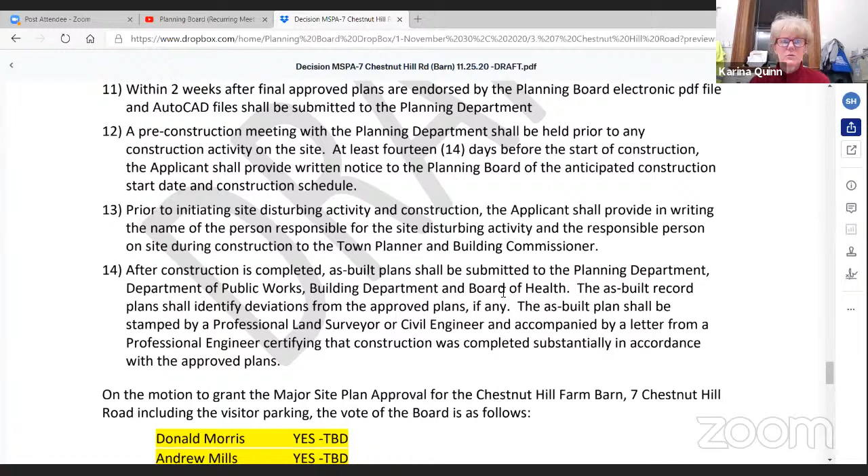Number 14: after construction is complete, the as-built plans shall be submitted to the planning department. That's a standard requirement, as well as to the DPW building department and Board of Health. And that will be a total of 15 conditions, because we added one between 7 and 8.

Okay, so unless somebody has an objection, then we would entertain a motion to accept these, to include these conditions as written and/or revised.

Mr. Mills: I make a motion we accept the conditions for 7 Chestnut Hill Road as reviewed and amended this evening. Seconded. Motion's been made and seconded. Any discussion?

Bob, DA, all set? Yes. Hearing nothing else, all in favor? Morris, yes. Mills, yes. Stein, yes. Latrell, yes. Houlihan, yes. Okay, so we've gone over all the materials, we've gone over the waivers and the conditions.

So we'll give the public and ourselves an opportunity to add anything else. If not, we would entertain a motion to close the public hearing. Anyone else? Questions, comments? I'm not seeing any hands raised at the moment.

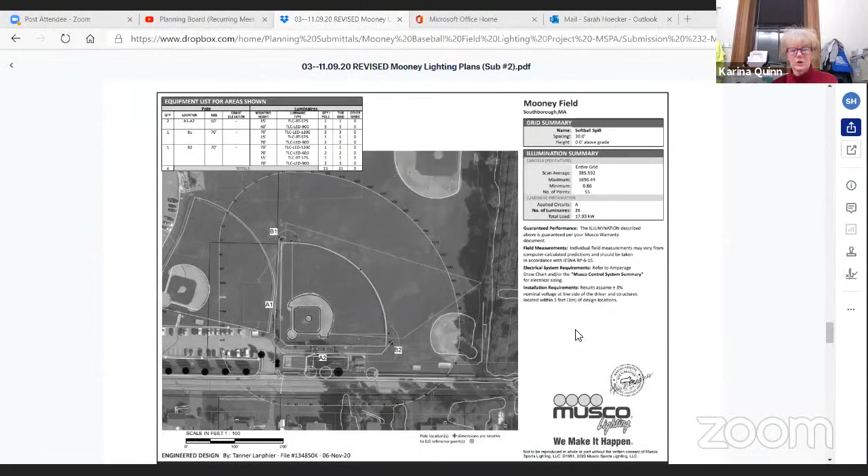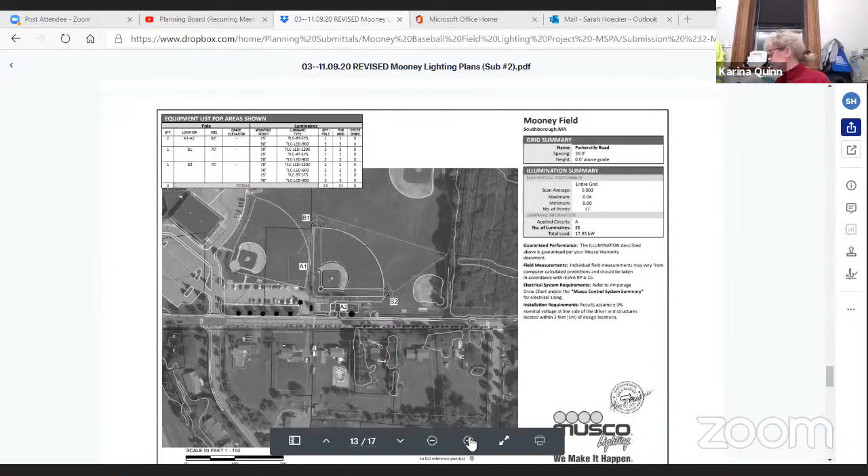But here, you can see on the screen, if you look at the bottom center, there's an A2. Well, you got to keep going a couple more sheets down. Right here, stop, either one of those. See, one is this, right there, stop right there, that's horizontal foot candles. And if you look south of the A2 label, right there, it'll say 0.04 or 0.02. So that's across the street, and there are street lights there. That's all I'll add to that.

In terms of adding shielding, if you've been in these meetings, all of our fixtures come with shields. We have looked at this 6,000 different ways to reduce the spill beyond this. To be at 100th of a foot candle that close in proximity to the field, there isn't any way to reduce that anymore. As Karina just said, we went out multiple decimal points here showing and displaying what the actual is. The reality is that's dark. It's black to be at that many decimal points out beyond 0 foot candles.

Anything else, Mimi? Well, my concern is that our bylaw says 0. There've been issues at Choate Field, and those abutters are much further away. I think we should do everything we possibly can to protect those abutting properties. They're very close right across the street. There's not huge trees or anything in their front yards to shield them from the lights.

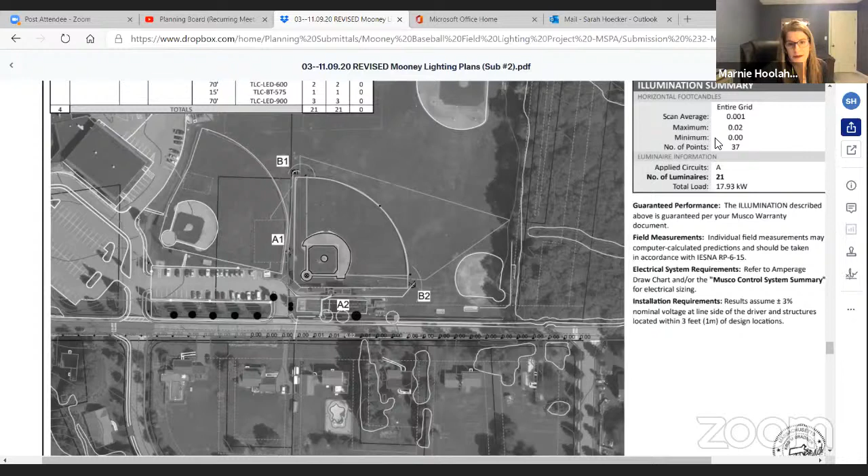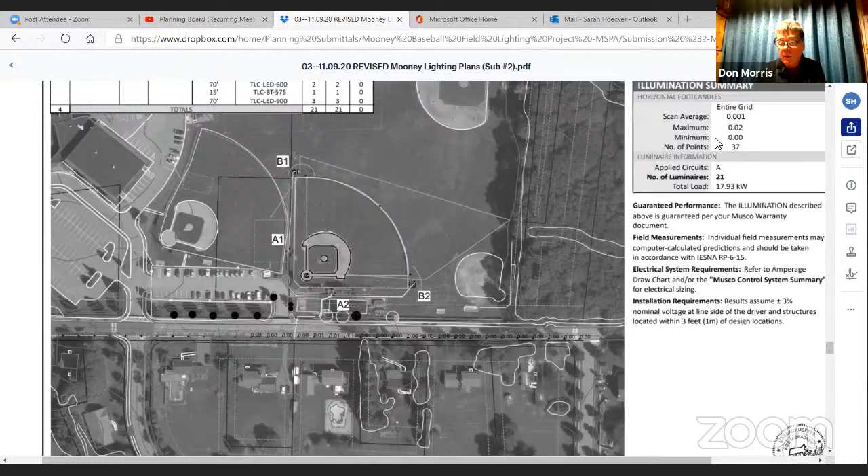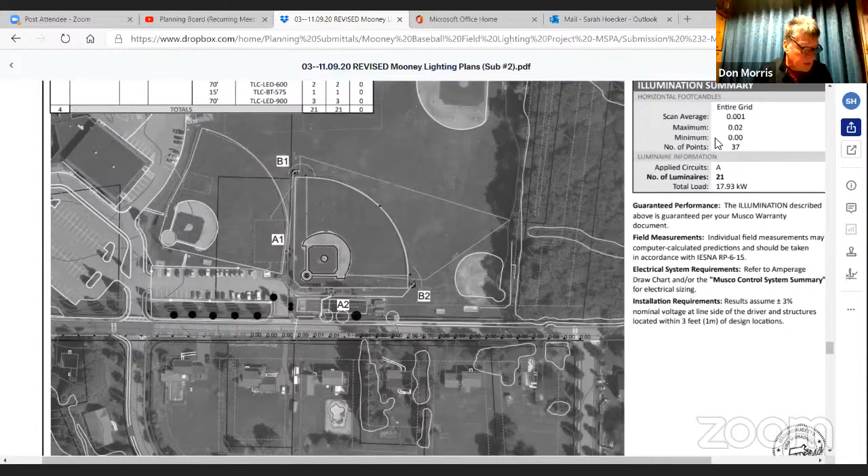So did Mrs. Houlihan speak to this? I'm fine with the waiver as requested. Mr. Mills? So moved, seconded. So the motion to grant the waiver has been made and seconded. Any discussion? All in favor: Morris, yes. Mills, yes. Stein, yes. Latrell, no. Houlihan, yes. 4-1. It's been granted.

So are there any other waivers? Nope, that's it. No, that was it for the waivers. Agree with that, Tim? Oh, sorry, yes, agreed. Okay.

So we want to go down through the conditions, the draft conditions. The reason we do this with these conditions is to discuss them and give you the opportunity to disagree or agree. But again, the vote relative to the conditions would be after we close the public hearing. So Karina, you want to take us down through, let's see.

Seven conditions? Ones that are highlighted? Oh yeah, I got the pages in the wrong order. I'll go through the boilerplate ones really fast and we'll just stop at the more specific ones. Go ahead. All right, Sarah, if you want to put the draft there, thanks.

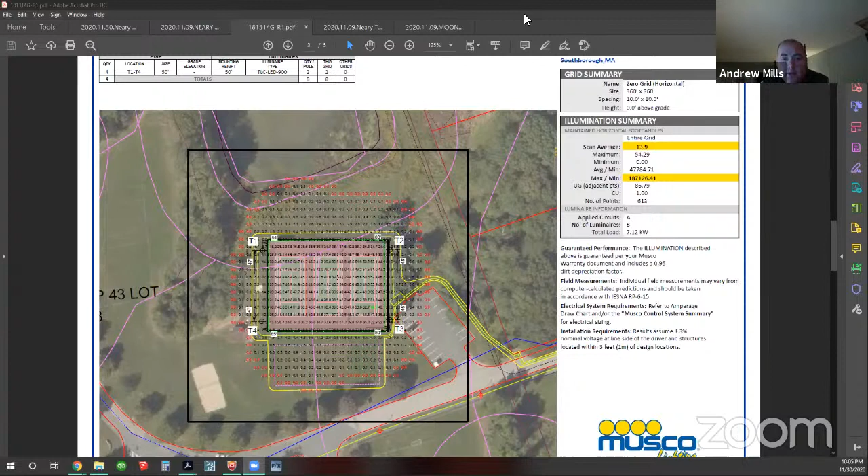Can you see that? Are they up? Probably not, hold on. Yep, yeah, we can see them. Oh, you can see them? Yes. Did I just move them? Hold on, wait, can you see those? Yes, very small, okay, hold on. Working on it. And Seattle's winning, I see too. Oh, yeah. Hold on one second, of course they're frozen.

Hold on one second, I'm going to stop sharing for a second, just so I can. All right, can you see that? Is that better?

So this is the horizontal at zero grid. You can see it's zero feet above grade on a ten foot by ten foot spacing. The red numbers on my cursor indicate the zeros and the spillage. So this is the property line, this far line. This line is the easement. So we're not even inside of the existing tree line, we're still at zero grid. You have these trees here, which will create a buffer, and then a heavy tree line along this edge that'll create a buffer. So we don't spill into the property line.

And then the vertical grid at zero, you can see the same. The red numbers represent the zero. Again, we're not within that existing tree line other than the existing trees that are there. We're off the property line for that area, and we're also outside of the setback, so we don't even encroach on the setback.

Okay, so that's good. So if you put those in the final approved set, that solves that comment. And then I would indicate the same, that this would be stamped by Vinny. I guess I would assume we would need to do the same thing. Correct, yeah. Mimi, while we have this up, and also Jesse, any questions on the photometric plan?

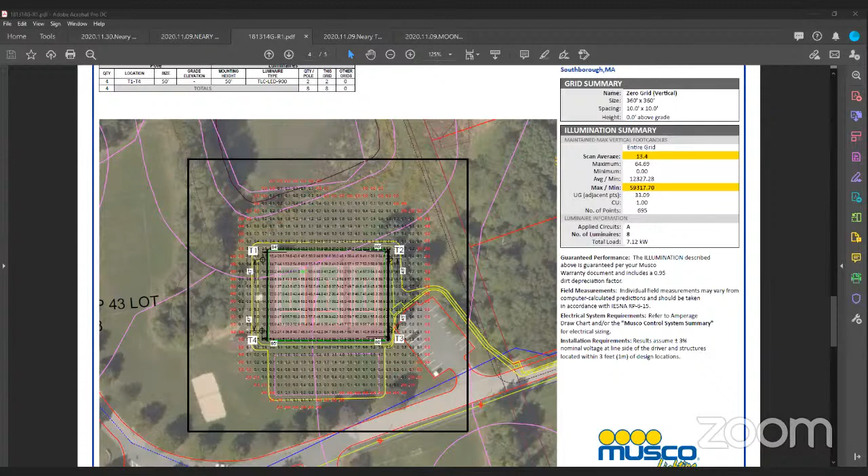Thank you. All right, we can go to the next one.

Hold on one second, I'm just trying to open my comments. The next one, so we went through that—the next comments were related to the controller. They were really regarding number 41, A, B, and C, related to the controller, which we discussed. Again, the controller would be the same. The rec department has the ability to set and manage that controller to meet the guidelines of the zoning approval.

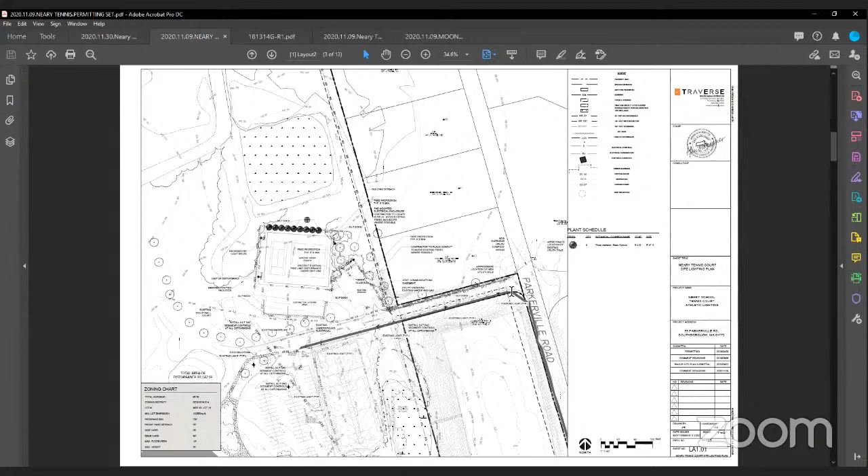And they were asking, there was a question about details for the controller. Can you see that as well? Before you go there, on part A—they agreed to add a note on the electrical plans referring to G101, correct? That's correct. So G101 refers to the zoning board criteria, their order of conditions. That's on the notes on our plans, so in that reference we'd be referring back to the notes for the conditions of the zoning board approval.

C discusses control devices. Again, all the lighting control devices are part of the Musco package, so it's a complete package. Timing will be controlled by the rec panel, so anything in the zoning board appeals will be able to be set by the recreation.

Parks and Recreation. And then the last one was about the controller box. If it's a NEMA 3R enclosure, it is a NEMA 3R enclosure, and controllers are weather resistant. It's on the same pad as the transformer, rated to be outside, and we can show that on the plans.

So just for my clarity, because I have a mixture of memory from when this originally got approved by the CPC—a prior director explaining how the lights would work and how they're going to work now. On this one, when the proposal first came to us at the CPC, we were told that individuals who wanted to play could turn on the lights so they could play, but they'd go off at a certain time.